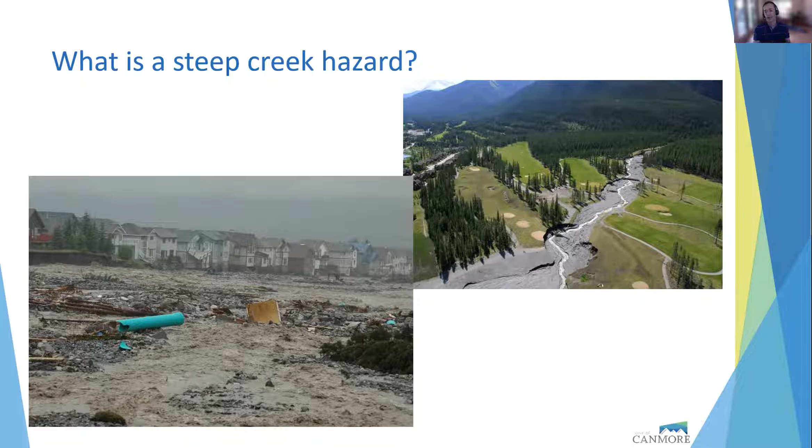Where material is deposited, it's called an alluvial fan. Unfortunately for our community and many others, evidence of these extreme events is covered by vegetation and lost. And these lands tend to create otherwise very attractive areas for development.

So wherever we have these alluvial fans, we have debris flow and debris flood hazards present, and that is on around a dozen creeks in town. Where we've developed these fans, we have risk to property, infrastructure, and lives. Prior to 2013, little was known about these hazards and risks in our community.

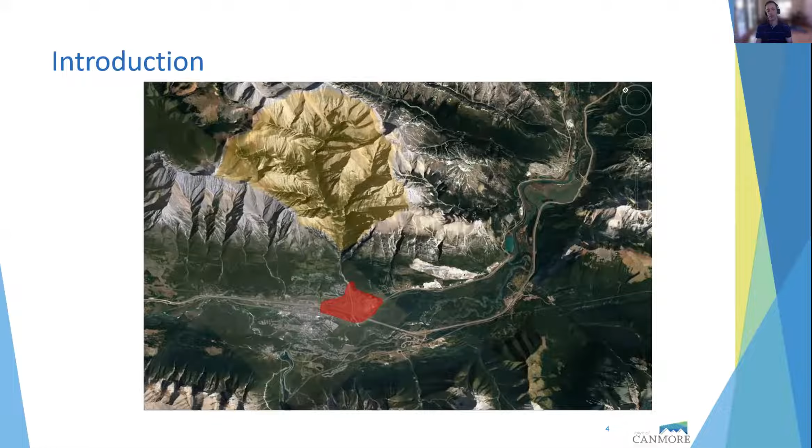So 2013, one of those rare events struck us on June 19th. It was a 3-day rainfall event in which we received in excess of 250 millimeters of precipitation, or 3 times the amount expected for the month of June on average.

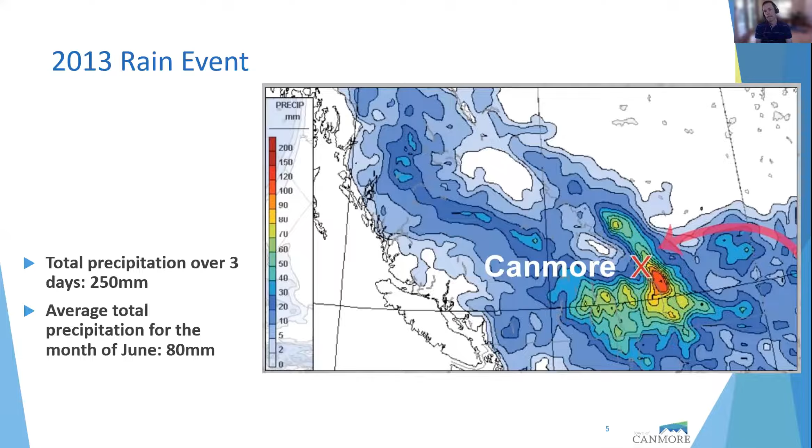Rain quickly saturated all of our catchments. It initiated a series of devastating debris floods and debris flows. Those caused tens of millions of dollars in damages to houses, highways, utilities, rail lines, and municipal infrastructure.

We had a lot of lives put at risk with our first responders and equipment operators, and they worked over 3 days to actually protect the community and prevent what could have been a worse outcome, and to get people out of harm's way and keep them safe.

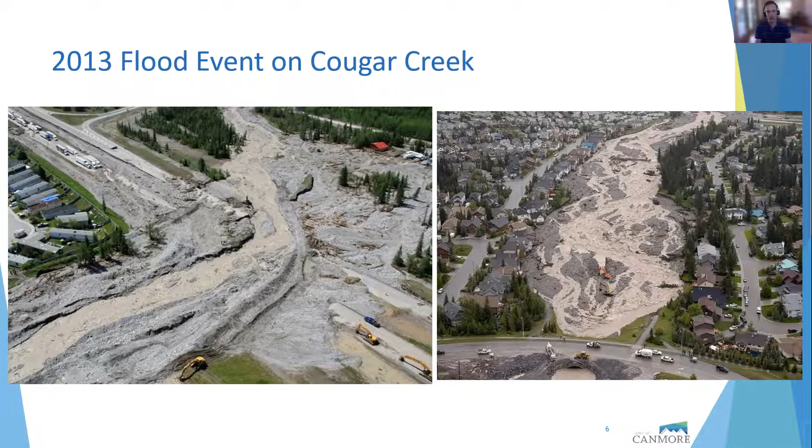We had a significant amount of mitigation that had been put in place based on a 100-year hazard return period, and that was entirely ineffective and completely lost.

Shortly after the event, we initiated a Steep Creek mitigation program, which included a number of elements. One, we wanted to have very good communication with the community, a lot of information sharing, and if you go on our website, you can now see there is a significant amount of information available there.

We also had to partner with a lot of key stakeholders. We have a number of significantly impacted parties like the rail line and the Trans-Canada.

We studied each of the creeks to try to understand what had happened. This was all quite new for us. We had expected quite different behavior on these creeks based on previous studies.

And we completed hazard assessments, which were in-depth looks focusing on the types of processes that these creeks can actually have, as opposed to a more typical clear water study, which had been done based on river studies, which is the historic practice in Canada.

Based on those hazards, we looked at all the areas of development and assessed the risk. We constructed in that year following a significant amount of short-term mitigation and have since been constructing longer-term mitigation to reduce those risks.

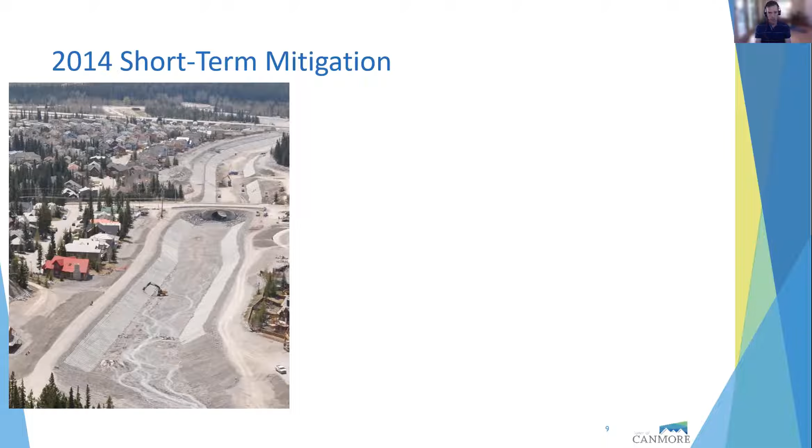So for Cougar Creek specifically, we're looking at some of the revetment that was put in place to prevent erosion in the year after — the concrete mats, which are now partially buried and obscured by the landscaping. We also installed a debris net, which was intended to protect against mobilization of all the loose material in the channel.

After the flood was filled with downed trees and loose boulders, had we gotten an event in the period after, it would have mobilized that and caused a lot of grief with the culverts.

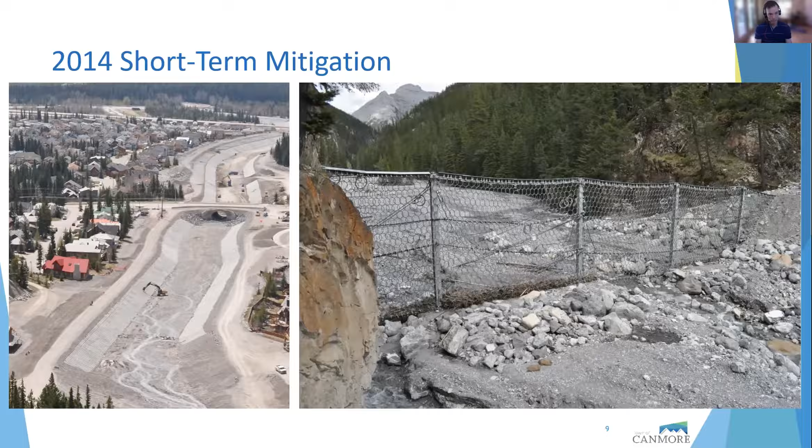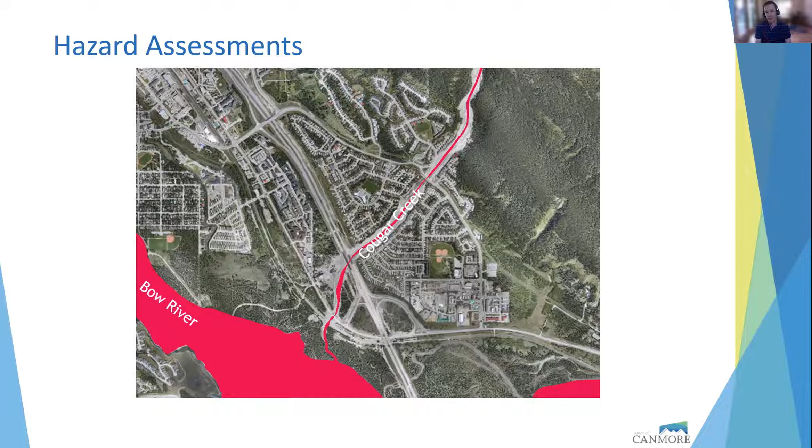This is a look at the hazard assessment pre-2013, completed by the province. This was focused on a 100-year hazard, a clear water hazard.

And just to give a sense of what we're contending with, not only is the hazard significantly worse for a 100-year event, but we looked at the full range of possible events, including much larger events than 2013, which there is evidence of occurring multiple times in the last several thousand years.

And so when we're considering hazards, it's really important for us to understand the full range of possibilities so that we can appropriately consider what is the actual risk to our community and how do we appropriately mitigate that.

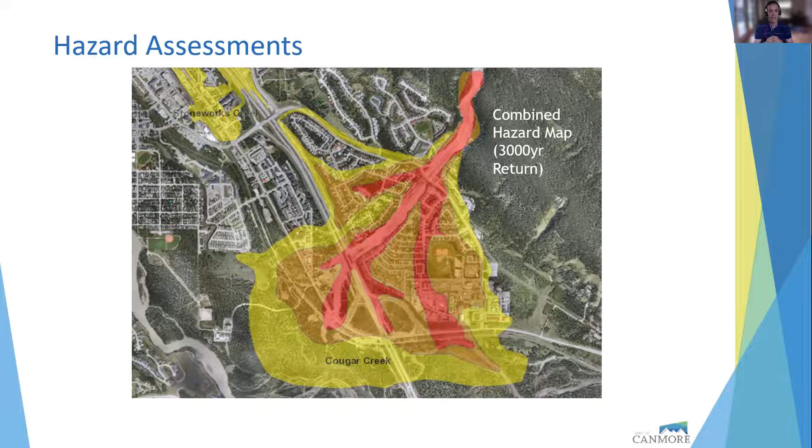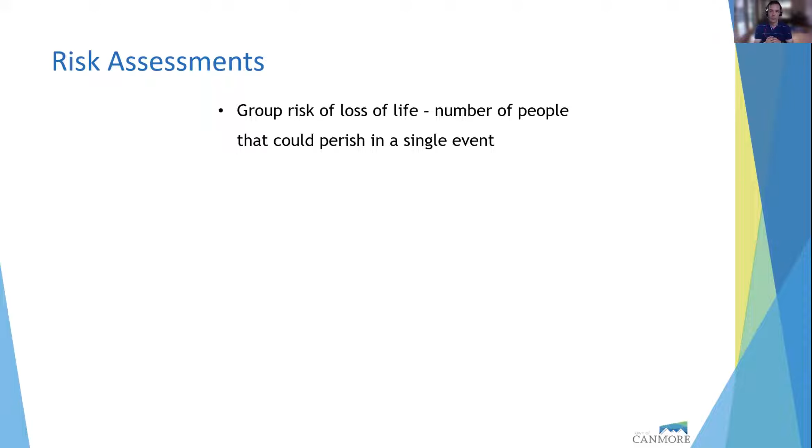And so with that hazard, we look at the development. We consider 3 areas of risk to individuals. If you're in your particular property, what is the risk? Group risk, which is the risk to the larger community, how many individuals could be affected in a single event.

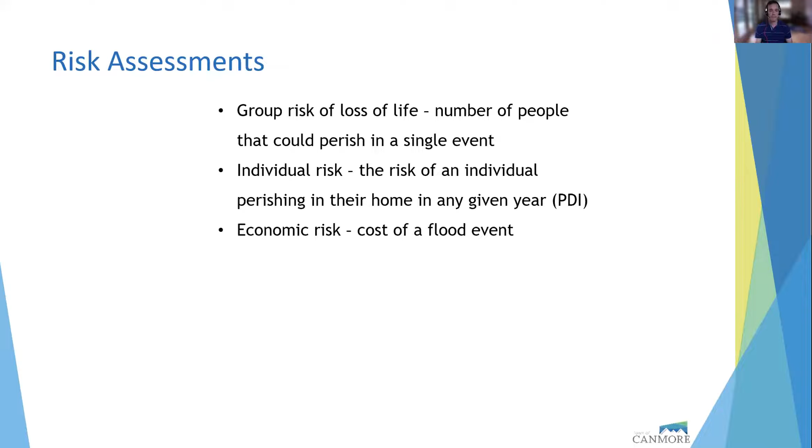And economic risk, the direct financial cost of a flood. This is a graphic in our risk assessment shown really just to show that there is a significant potential for risk of loss of life in the Cougar Creek area.

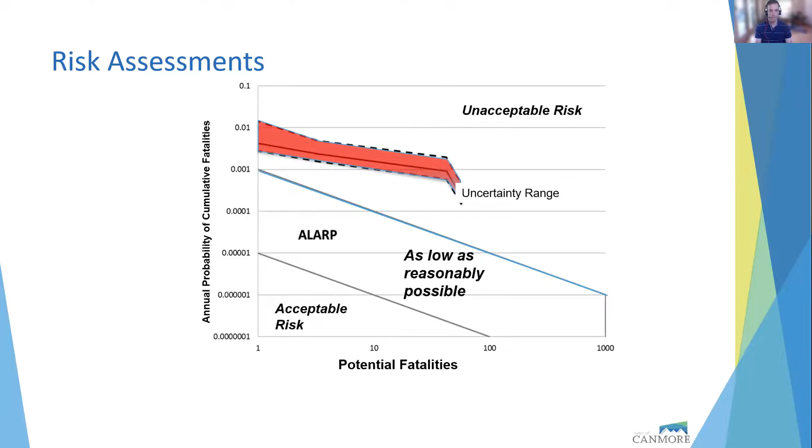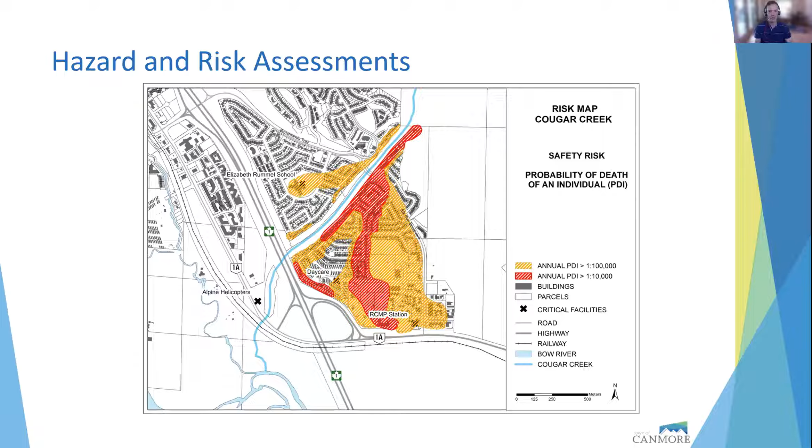We have a higher risk threshold yet. We want new development to be 10 times, built to a 10 times safer standard. It's hard to retrofit and reduce risk for existing development, but is something we want to prevent with new development. And that's shown in the yellow areas. Those wouldn't meet current new development risk thresholds.

So based on all that information, all of which is on the website for people who are looking for more information on the reports, we looked at 3 options for mitigation. And the goal with that is to reduce the risk to those tolerable thresholds. And the 3 options we looked at were the debris flood retention structure, the one that's being constructed.

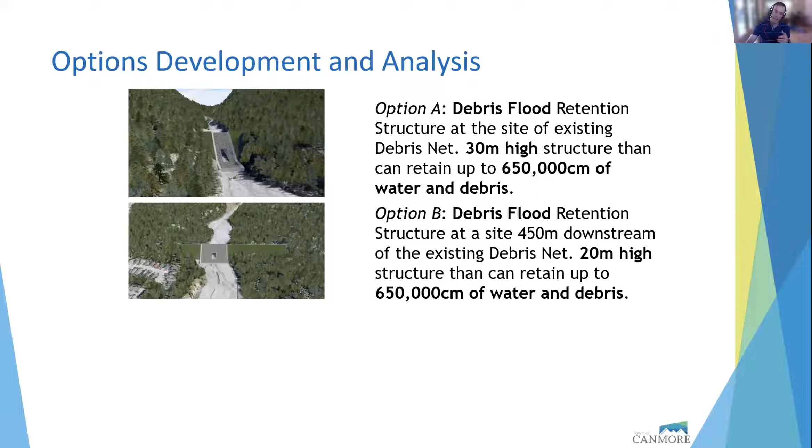We also looked at a similar structure which functions to retain water and sediment, hold that back and discharge it at a rate that the culverts and channel below can handle. So we looked at that same type of structure, but a little further down. And then the 3rd option was looking at retaining debris only and allowing flow through.

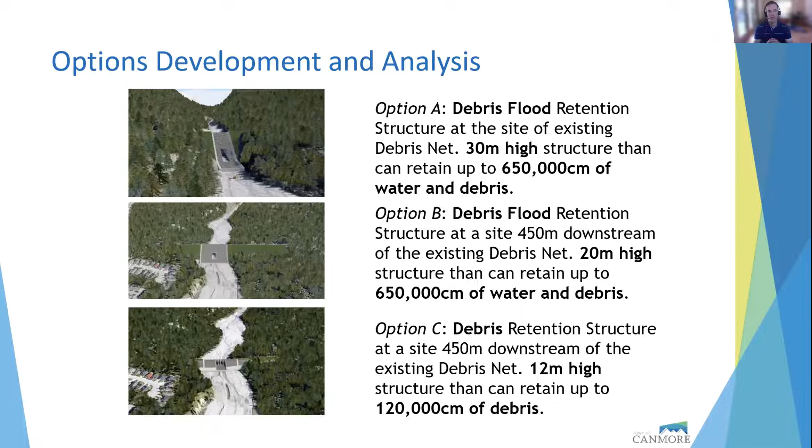And ultimately, based on a number of criteria, the first option was selected, and that'll be the basis for Felix's update.

So with the short time, that's obviously just a very high level look. There is a significant amount of information. All the mapping you've seen is available on our online property viewer. You can zoom in on your individual properties. We have published and made transparent every piece of information that we have on flood hazard and risk in the community. We think it's important that our community members fully understand so that they can prepare themselves individually and understand that with their property. And so it's all there, as is our overall Mountain Creek hazard mitigation program.

And with that, I'll turn it over to Felix.

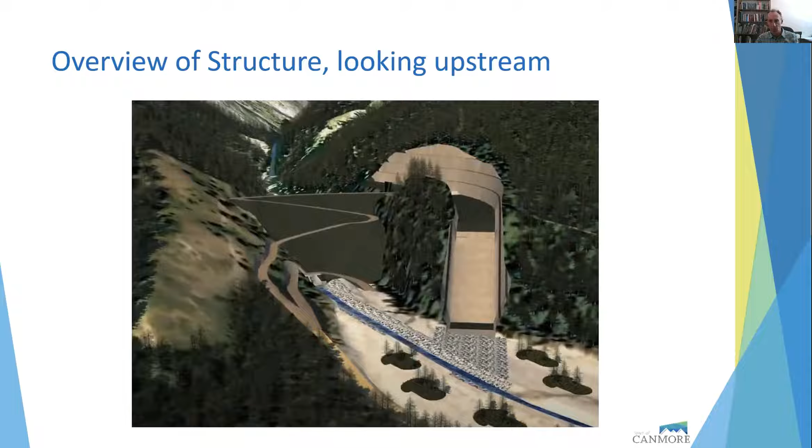So this whole area here is basically the emergency spillway, and I've got a few photos that will show this. The next area to discuss is basically the whole structure, the embankment dam itself. So this is basically what the main structure is going to be built on the side view. It's basically this triangular shape, and this is all rock fill material in here.

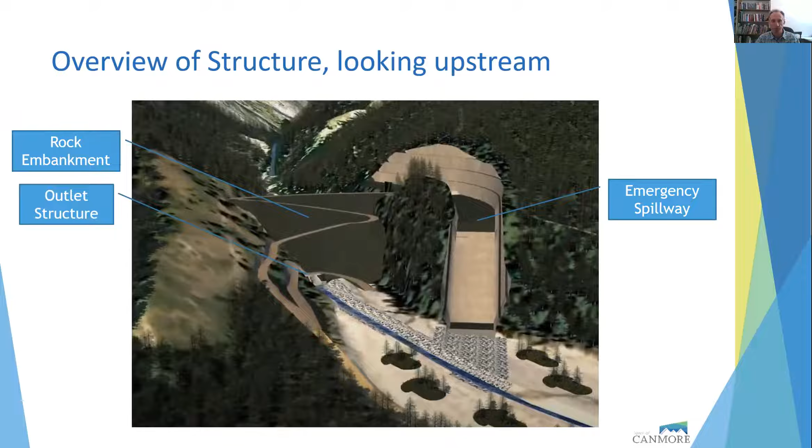And then the last one on this slide here is this little area here, which is the outlet structure. And the outlet structure is where the water will be flowing out of the creek once it's being diverted through the structure itself. And then just downstream of that outlet structure is a stone pitched channel. I've got a photo on that too, and I just want to make sure that people understand where it is.

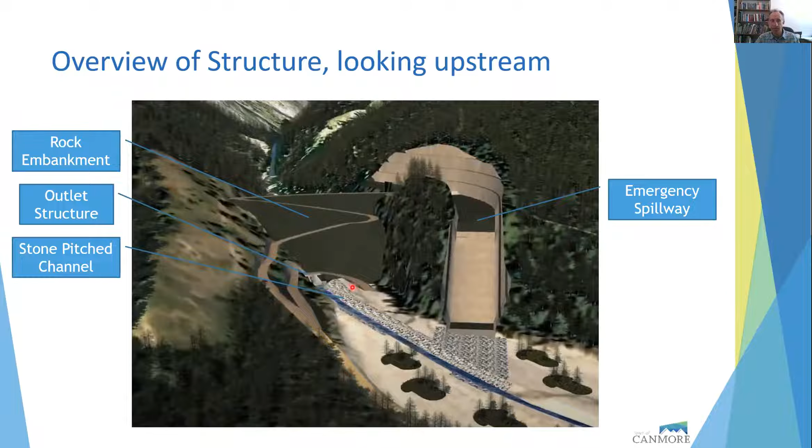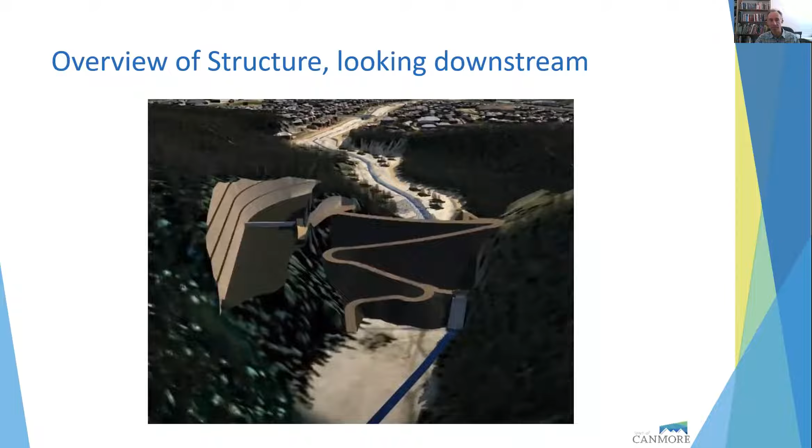Now, this is also another rendering, but this is an overview looking downstream this time from the air. And you'd have the same emergency spillway on the east side of the structure.

On top of the structure itself, and you can see that too on the other slide, the previous slide, is basically the crest at the top here, but also the access road. So we have an access road that will be coming all the way to the upstream side of the structure. And this will be used for inspection of the structure when it's finished, and also for maintenance, debris removal, etc.

Now, on the upstream side, we do have the intake here, and this is basically where the water will be going through the structure. This is where it's going to enter the structure, basically.

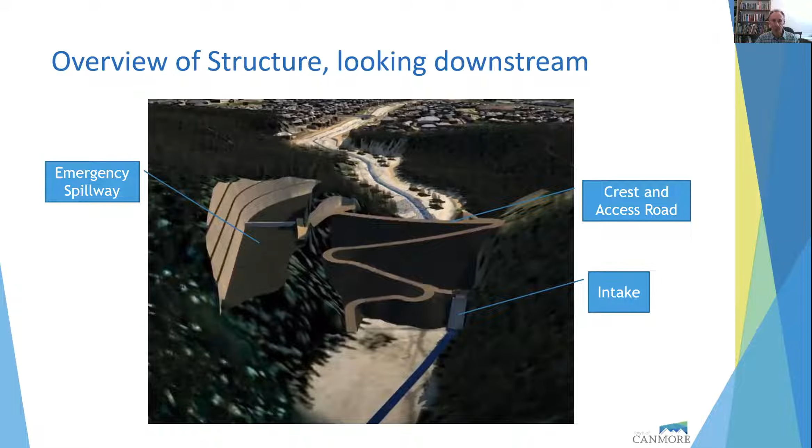Now, looking at the last slide before the actual photos, this is a plan view of the structure. It's our drawing, and you can see the spillway, the outlet structure, and the intake. The flow of water here is from the upstream side, and it flows downstream this way.

The other thing you can see here that I'm adding is the rock cut, which I'll talk about in the first few photos. We had to basically blast the rock here to create a more vertical wall. At the bottom of this wall is where the low-level outlet is being constructed. The low-level outlet is the tunnel connecting the intake to the outlet structure, consisting of a large 3.1 meter steel conduit.

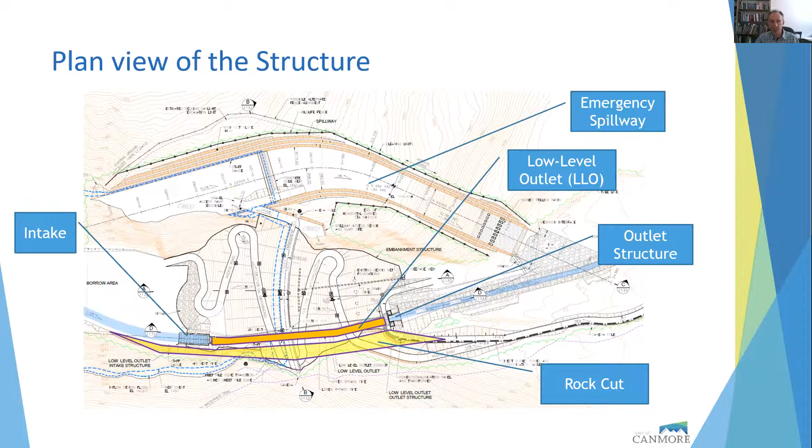There you go, first photo. This is in order, following the timeline since the start of construction. So in August, the main thing the contractor was doing, outside of the mobilization efforts themselves, was the rock cut up here.

This is a representation of the shape of the rock before the rock cut was undertaken. Some areas had fairly shallow grades, others were steeper. The end result is a wall that's about 70 to 80 degrees steep. The bottom area here, where that excavator is sitting, is basically the foundation of the low-level outlet that I've shown before, and you'll see more photos of that.

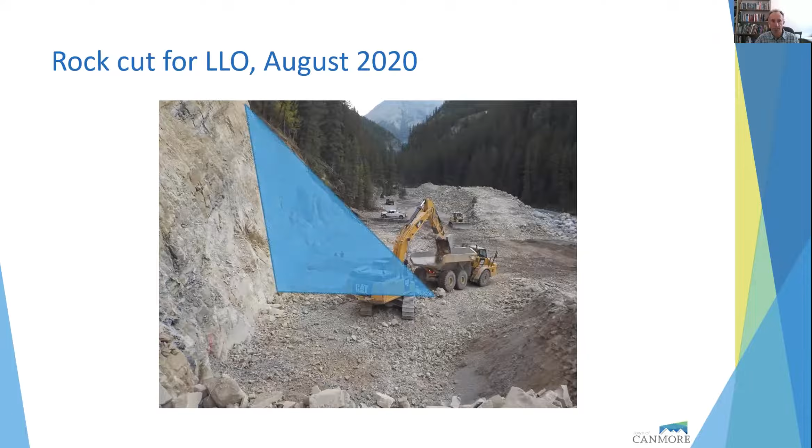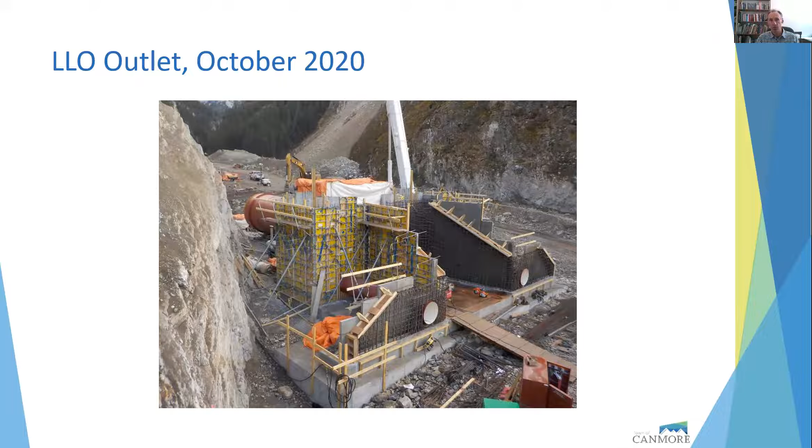We also have a bypass pipe here and another one on that side. Those pipes also go all the way to the upstream side of the structure and are used when there's maintenance being done on the main conduit and we need to close it off to inspect it. Or if there's any issues with that main conduit, we can open up the valves on these bypass pipes to let water go through while we fix the issue.

Also from October 2020, this is a view looking downstream at the foundation on the bedrock here for the low-level outlet. You can see that large pipe sticking out.

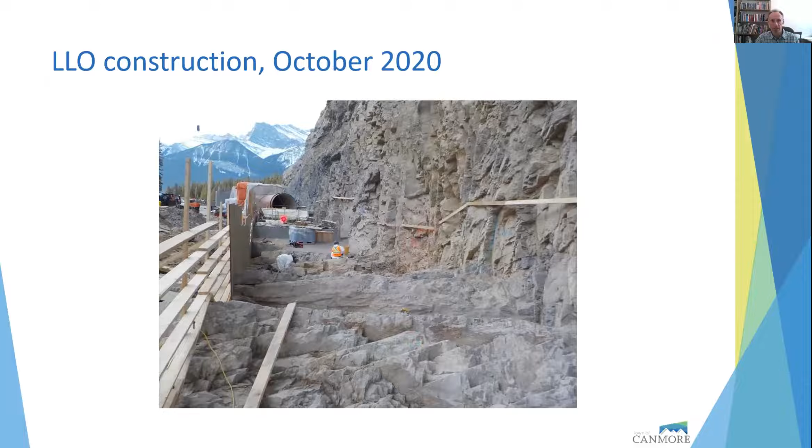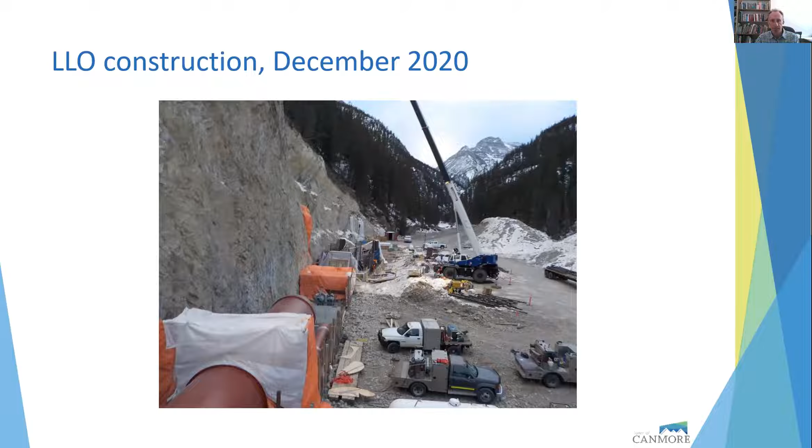Now into December of last year, this is a photo looking upstream, and you can see here that large pipe being installed at different intervals. You can see some hoarding here that I'll talk a little more about in a few minutes. They've been using mostly a very large crane to put in place those large pieces, including the bypass pipes and a lot of the formwork for concrete. That large crane has been on site since the beginning of the project pretty much.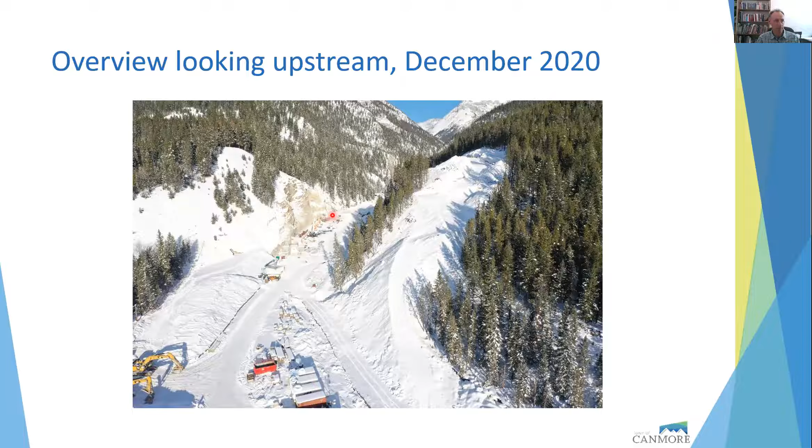Even though this winter was fairly mild compared to previous winters, we still had requirements to do a lot of hoarding, which is basically placing tarps on top of a lot of construction area, especially when pouring concrete, to ensure we meet the specifications. Doing construction work like this in winter is definitely a bit more challenging, and even in a nice winter, you still need to go through all those steps.

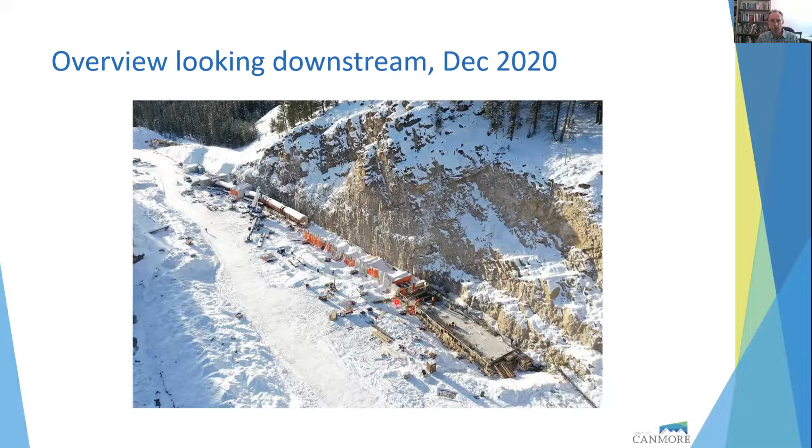During that week of February, it was really cold, and construction pretty much came to a stop for a few days, with only essential work happening. Of note too, we had a winter that was quite windy, with a lot of very windy days that kind of wreaked havoc with our tarps throughout the winter.

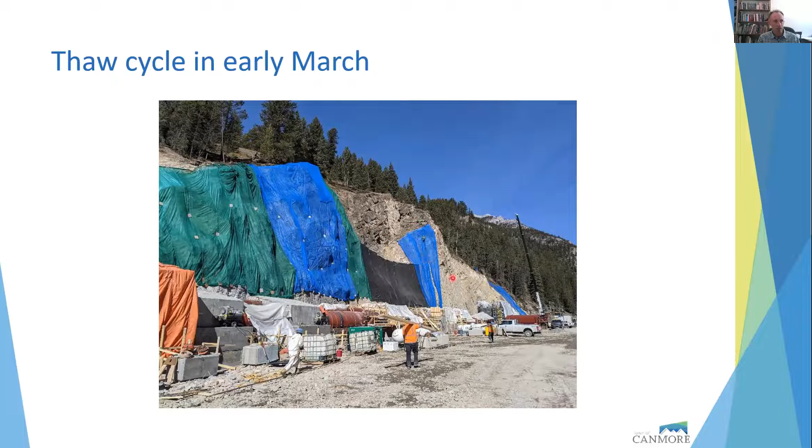This mesh is temporary and will be removed as the construction continues. At the end, you won't see any of that mesh up there. You can see somebody here doing the install - a lot of the install was actually done on ropes from the top down.

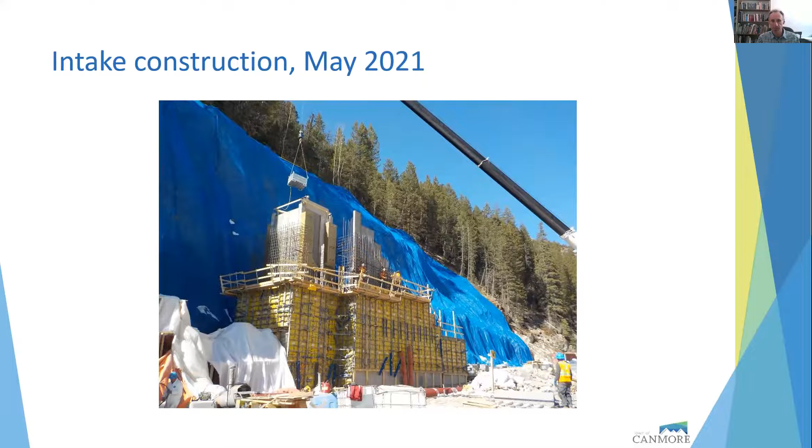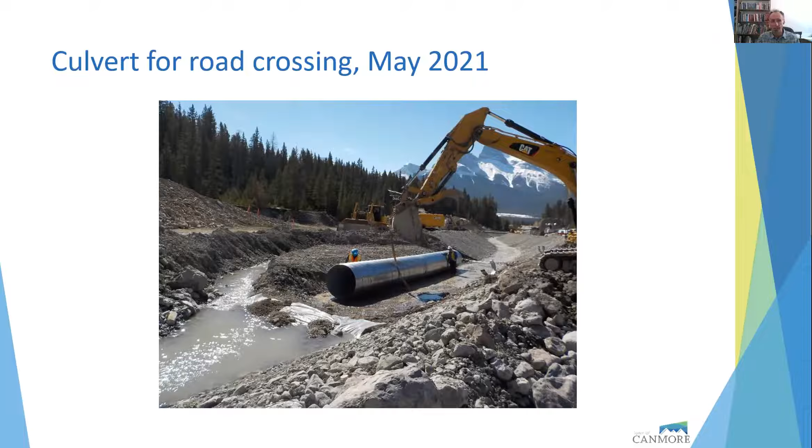So basically, this is our access road at the bottom of the creek here. It starts from the Cougar Creek rink and goes up along. To ensure that the road will not get eroded during small events like what we're having right now with snowmelt, the bank of that road was protected by large riprap. The contractor took that riprap and placed it there.

And then when we saw that, we were wondering if we have a large event, if we could actually have some issues at the toe of our concrete mats due to the width of the channel and being as wide as it is. Therefore, the contractor took some of that larger rock and placed it along the west bank.

Then in May this year, the contractor was about to do the stone pitching, the grouted riprap just downstream of the outlet structure, and they realized that they didn't have enough riprap available close by. The best source was actually the riprap that was along the banks here. Therefore, they proceeded to remove the riprap along here because that was the best rock for the job, take it upstream, place it - I'll show that in the next slide - and proceeded to take some smaller rock and replace what was removed from the banks here.

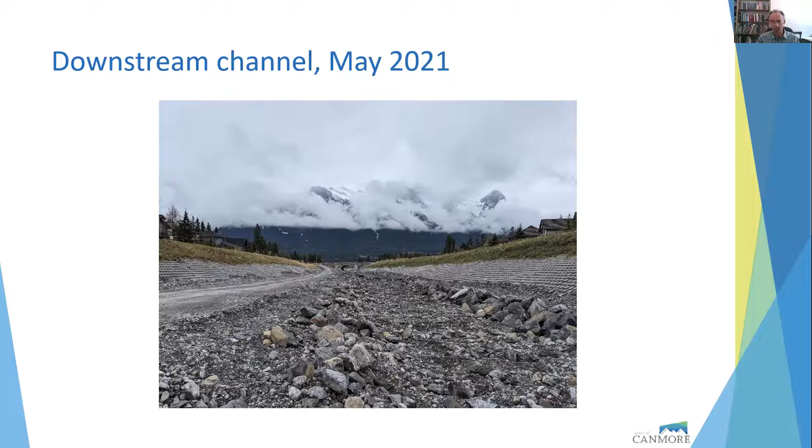We use very large rock and encasing concrete, basically quite similar to what we've done at Highway 1 at the inlet and outlet of the culverts there, maybe 4 or 5 years ago now. So very, very much the same principle here. Just downstream of that, there's a little bit of riprap, but yeah, that's what it looks like right now.

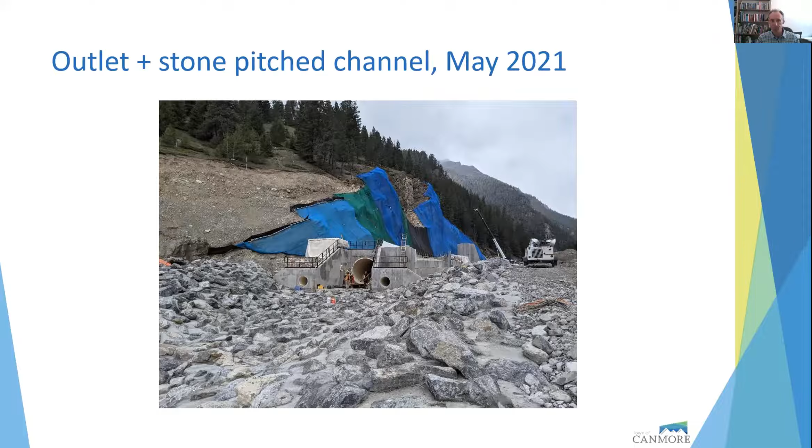This concrete here will not be visible because it is buried under the whole structure, which will be basically coming up this way and kind of back down here from a side view. And right now you can see the creek diversion at the bottom end here.

And this is where the creek is currently flowing. Again, in a few days here, it will actually be going through the inlet, through the conduit and out on this side. And that's where it will be flowing for the next several years after that.

So these are the photos I wanted to show here in terms of next steps on the project. Again, the water diversion is the next step. As soon as the water diversion is complete, then the contractor can start doing a lot more work on the foundation works and the construction of the core and the seal wall.

So I'll just flip back to this photo here for a sec. Basically at the middle here, this is the center of the structure, and this is where there's going to be a seal wall going all the way down. We have to tie to bedrock, and to be able to do that, we need to do a large excavation.

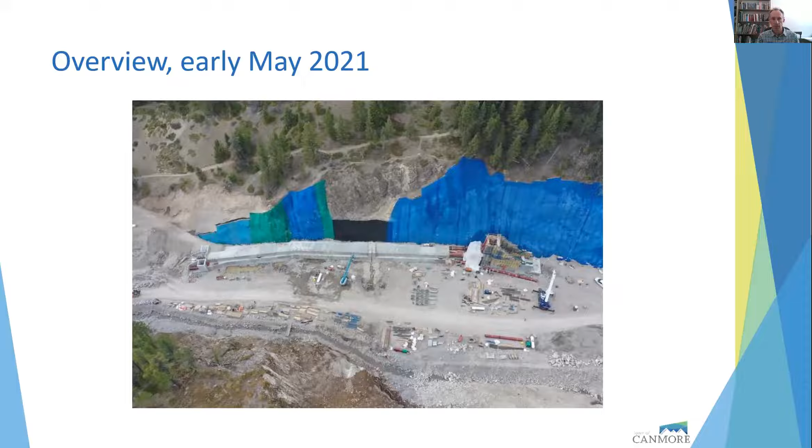So most of this area will be excavated, and that's why we need the water to be flowing through this to do that. Then the foundation will be placed on bedrock for this seal wall. Then the seal wall will start being built up and backfilling, basically up to the creek level.

And then the next step is going to be really working the spillway and the embankment itself. So of note, the spillway rock, whenever we're doing blasting and rock excavation, that rock is being used to actually build the embankment structure. So we have minimal requirement - basically no requirement - to actually import material in to construct the embankment. That was one of the changes we made to the project about two and a half years ago, and it basically minimizes the amount of heavy truck traffic coming through the site.

Once the spillway and embankment works is complete, then we basically go to installing all the monitoring equipment, doing reclamation of the structure of the whole area, and then commissioning the structure before it's in full operation.

In terms of expected completion, right now we're still expecting the project to be completed summer of 2022, with work ongoing throughout the summer and the next several months here.

Just before I go to that, one last thing. There is lots of uncertainty coming up here with the foundation works. So this is one of the key areas coming up, and if we see that there's changes to schedule or anything like that, we'll make an effort to keep you guys informed on what's going on there.

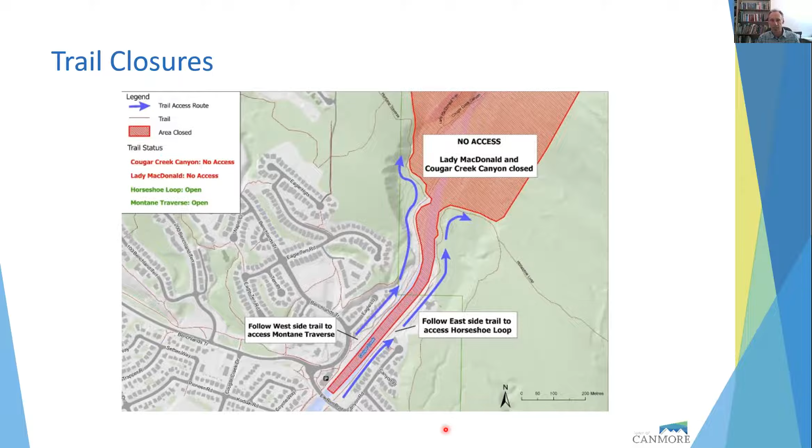This is pretty much my last slide here. So in terms of emergency preparedness for the project, because we're working right in the middle of the creek in May and June, and also throughout the year, you never know.

So we have a specialized weather forecast from UBC that's just specific to Canmore, and it's being updated on a regular basis every 3 or 6 hours. And we use that to provide some really good information to the construction crew on site.

We're also in communication with Alberta Environment and Parks, in direct communication with them regarding any major storms coming, and also related to the Bow.

We've created a specific construction emergency response plan just for during construction. And we've undertaken some contractor and consultant training for the project to be sure that we're all ready for emergency preparedness. Also internally at the town, we just conducted a tabletop exercise with a lot of the senior people at town in terms of emergency management specific on Cougar Creek.

In terms of what you can do to be prepared, well, you can be knowledgeable and informed. There's a lot of information on our website and also on the provincial website in terms of potential hazards you can face, and also knowing what to do in case of an emergency and an evacuation.

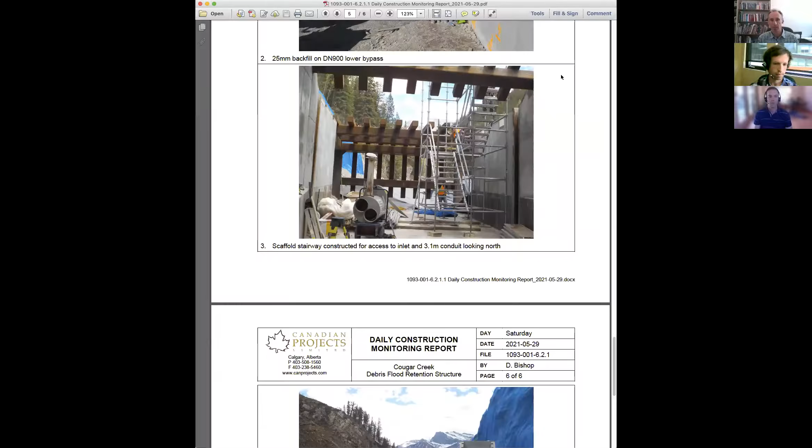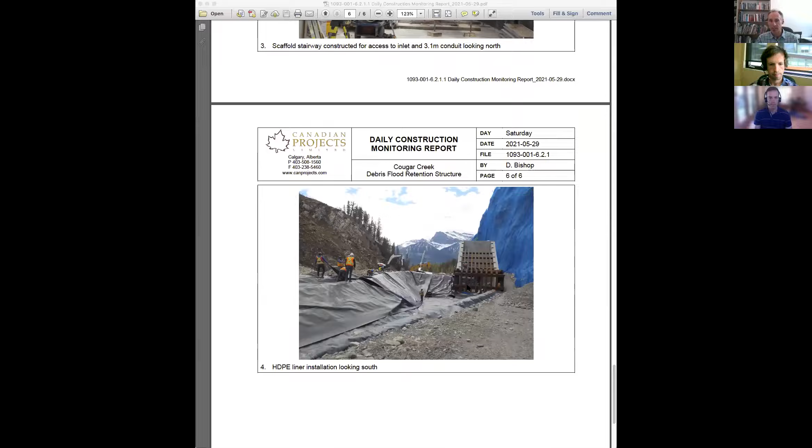So the intake itself, on those kinds of structures, typically stays clear for a long time. Oh, there you go, Andy is just showing you here, that's the intake with the rake shown on the right side. So that's basically how this works. This principle is being used in Austria quite a bit, and Switzerland, and Japan, and other places. So it's not necessarily something that's new, it's new for us here in Canmore, but not in the world.

Our next question, I can take an initial shot at answering this and Felix maybe you can follow up. Is there a project schedule with major milestones on the town's website? So the answer is no, but we do update our Cougar Creek webpage on a bi-weekly basis with construction information, major things we're working on that the community would want to be aware of.

But Felix, did you want to mention any major milestones in the project? Well, we do have some major milestones, obviously. One of them is completing the low-level outlet that's just being finished right now, diverting the water, then doing the foundation works and going back up to the creek level. After that, the next really big one is to bring that all the way up to the top. In terms of dates, I'm not sure I want to say too much about that because it's a construction project, it changes. But I think the main thing to keep in mind is just the end goal and where the project is going to finish.

Our next question is, why is the electrical installation still required a year after it was scheduled or installed?